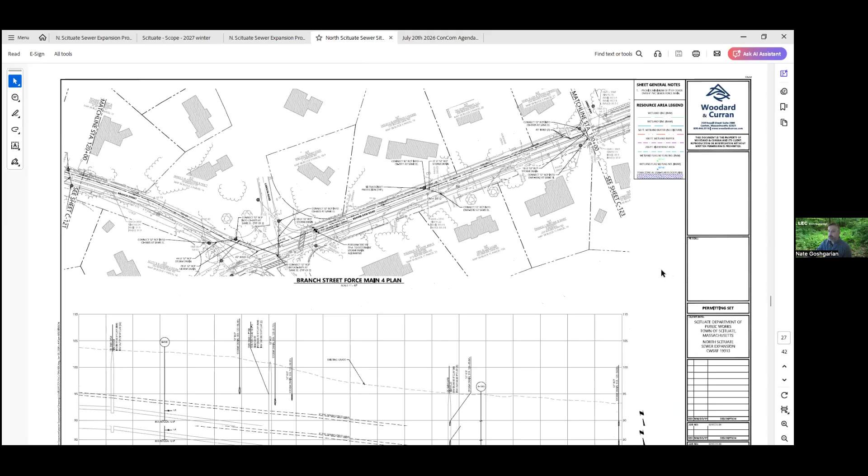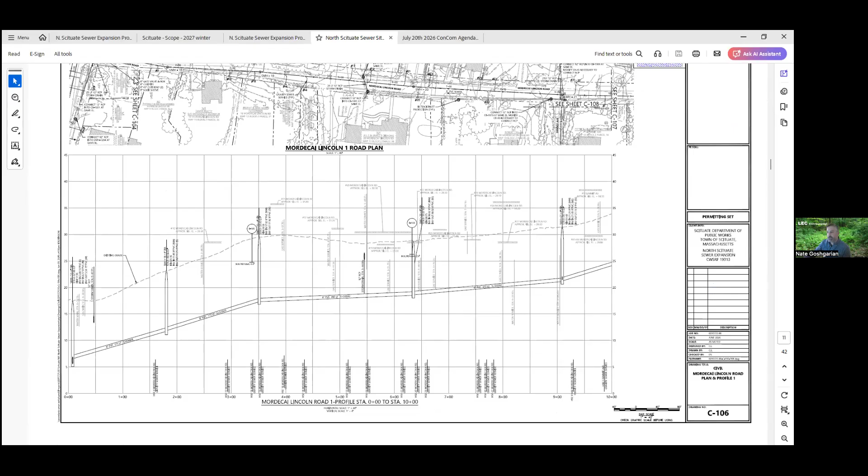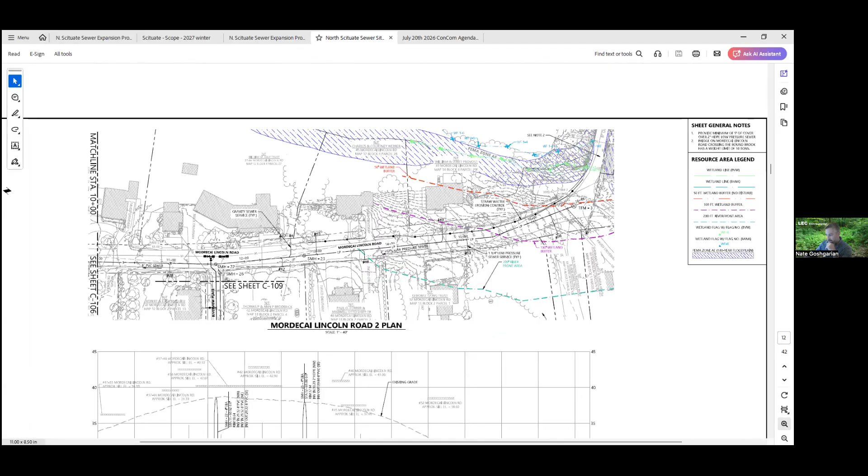Yep, perfect. So this is on its side, north is to the right. Basically what we have here is the wetland delineation in blue of bank/mean annual high water to Bound Brook. Then in green directly up gradient is our fringing bordering vegetated wetland system, and we've got the 50-foot buffer zone as well as the 100-foot buffer zone in purple. A little farther at the bottom of the page in teal blue, we've got the 200-foot riverfront area. So I wanted to show how our wetland delineation translates to the plans, as well as the associated buffer zone and riverfront area.

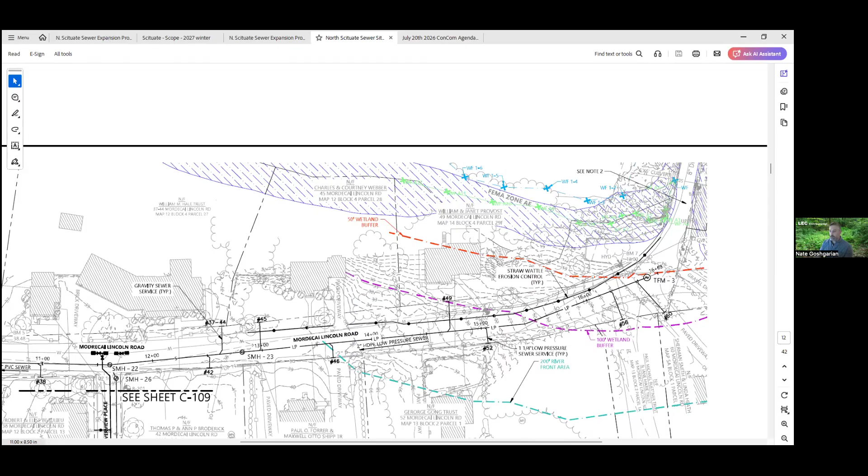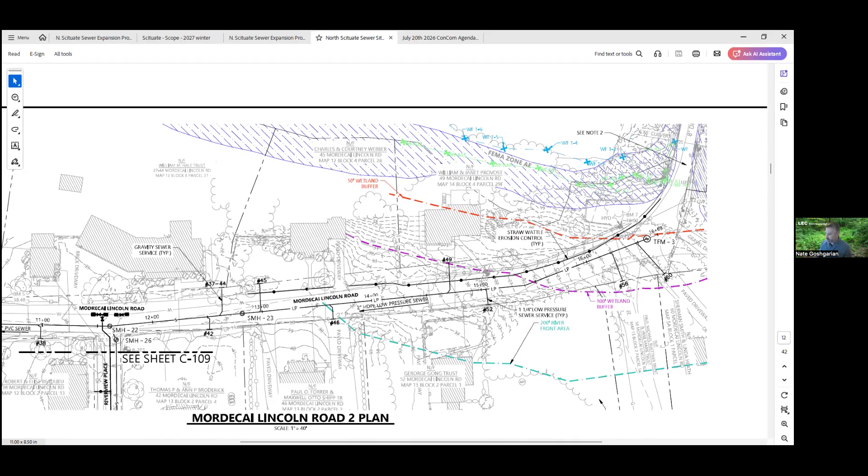This snapshot is pretty characteristic of this area in terms of what wetland resource areas are present. There are only two other sections further down a couple miles on Country Way that I want to briefly go over, regarding the two culverts being replaced. One is smaller than the first, so let's take a look at the smaller one—that can be found on sheet C112, if you don't mind.

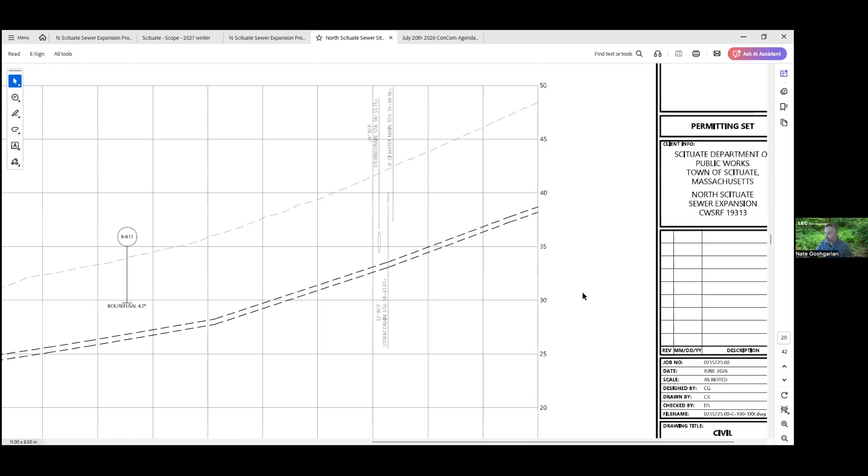Big set. There we go. Perfect. Just a little to the left.

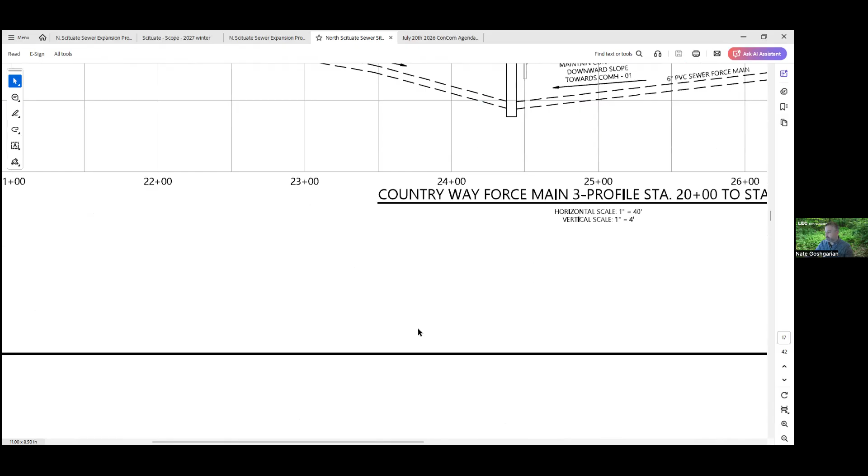The next sheet, if we could just take a quick look at that, that'll be C117. That'll look very similar to this, although the footprint is a little bit larger. So this is our second culvert to be replaced. It's a little bit larger, comes in at 28 inches by 28 inches by 60 feet.

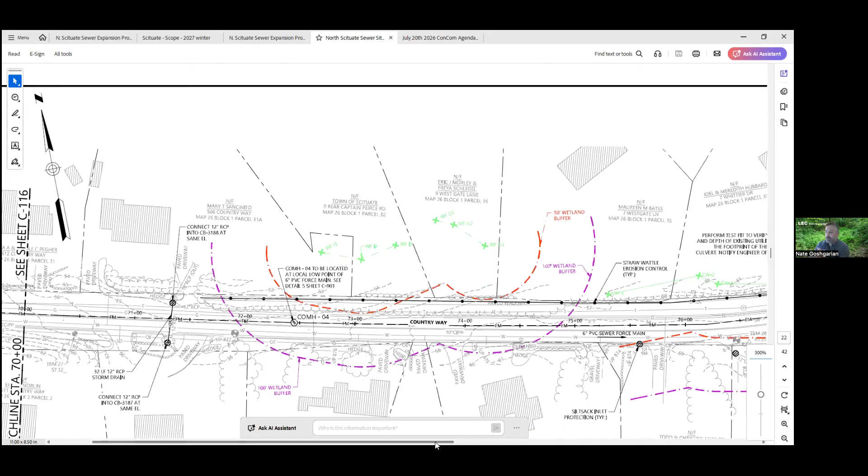You also notice that we do have a bordering vegetated wetland that I flagged out there on both sides of Country Way. Again, I just wanted to show the delineation, how it shows up in the respective buffer zones, as well as the footprint of work, which in this case specifically is the culvert replacement. So that's really a general overview of all the wetland resource areas that are effectively along this project footprint. Mr. Chairman, I'll hand it back over to you. Happy to take any questions.

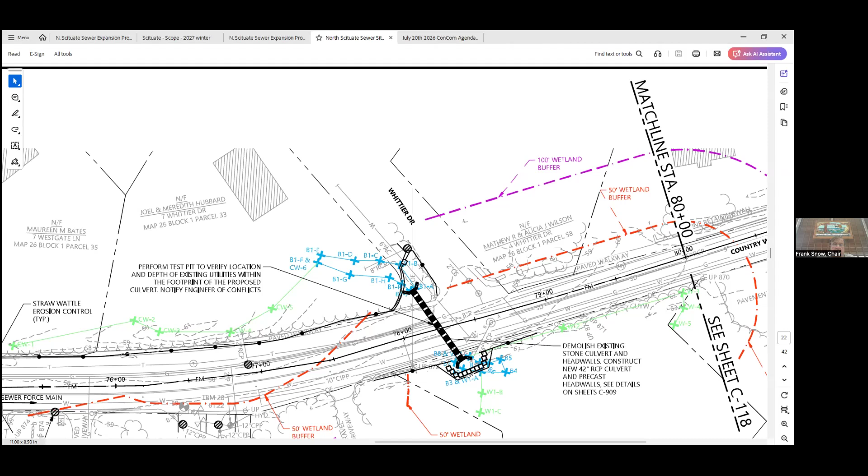Thank you. Jen, do you want to comment first? I think my question, I can't find my notes at the moment, was when might we start this work and how long do we think it would take? And I'm sorry if I missed that in the beginning.

Sure. No, I didn't go over schedule. So we're currently going through the permitting phase. In addition to this, we have an Army Corps permit we're working through right now. We're also going through securing funding through the SRF program. So those are the two main schedule constraints right now. It's permitting and funding. So the town's already been awarded the SRF funding, but we have to go through the loan package process. So long story short is we're looking to bid this sometime in the fall and start construction in the spring of 2027.

As to where the contractor is going to be working at certain times, that's means and methods. But on the gravity side, he's going to start down by the pump station and work his way from Country Way and Gannett Road upstream, up into that area closer to Cohasset. But then with the force main and the culverts, that's going to be a little bit on him or her to decide really the timing of all that based on their means and methods, just because the force main isn't gravity, it's pressure.

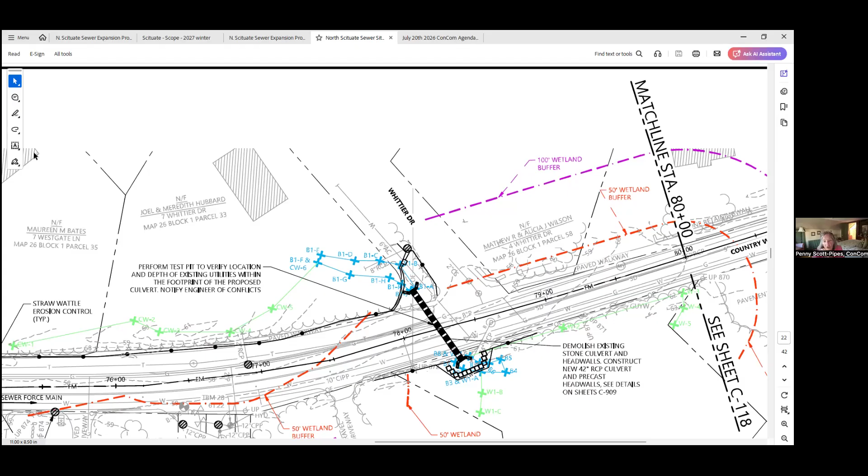Thank you. Welcome. Penny? No, I'm surprised it's gonna be done that quickly. It all looks good to me. I have my faith in their wetland lines. And, they know we'll be keeping an eye on them to make sure we don't disturb or pollute any of the wetlands. But thank you. Okay. Brendan? Yeah, I don't have any questions.

Robbie? Thanks, Frank. Thanks for the presentation. It's a great project. I think it's a long time in the making. Couple of questions I had. Could you describe the erosion control measures that you expect the contractor to take as they're constructing this?

Or Kendra, do you want to go over those? Yeah, happy to. My name is Kendra Robinson. I'm with Woodard and Curran on the civil side. We will expect the contractor to install straw wattles along the areas within the buffer of the resource areas and in other places as directed by the owner or engineer if we see a lot of sediment buildup and dispersion throughout the project area. We will also have silt sacks in all of the catch basins along the project area to prevent sediment from directly discharging into the stormwater system. And then at the culvert crossings, we'll have silt sock there for erosion control, as well as turbidity curtains and some coffer damming as necessary to make sure the work is completed in the dry to prevent sedimentation from flowing downstream.

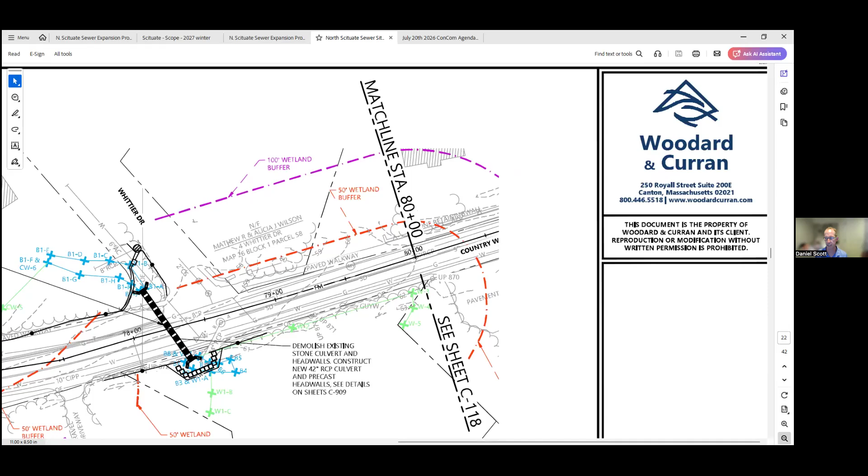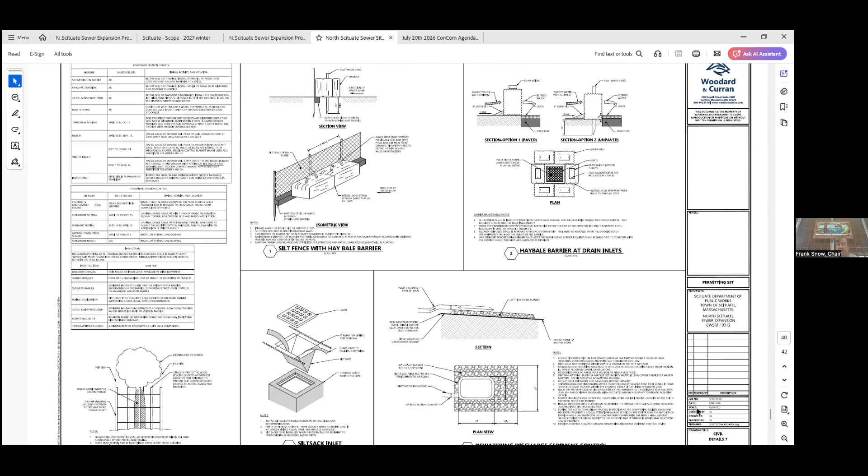And then the staging areas, is that something that will be conveyed to the commission members or Jen, so that we have the opportunity? Thank you for that. Will the staging areas or laydown areas be something we'll get notified on so we can look at that? That seems to be sometimes where we have a little bit of a hiccup.

Yeah, through these meetings and at the forefront of the project, anything in particular you want to be engaged on would be great to express to us and coordinate with us. We're more than happy to have an on-site meeting at the start of the project, once they get a representative amount of erosion and sediment control in place, and can talk big picture on the project. Or if members want to join our kickoff meeting at the beginning of construction, we're all for having you engaged as much as possible to make the project successful on the Concom side.

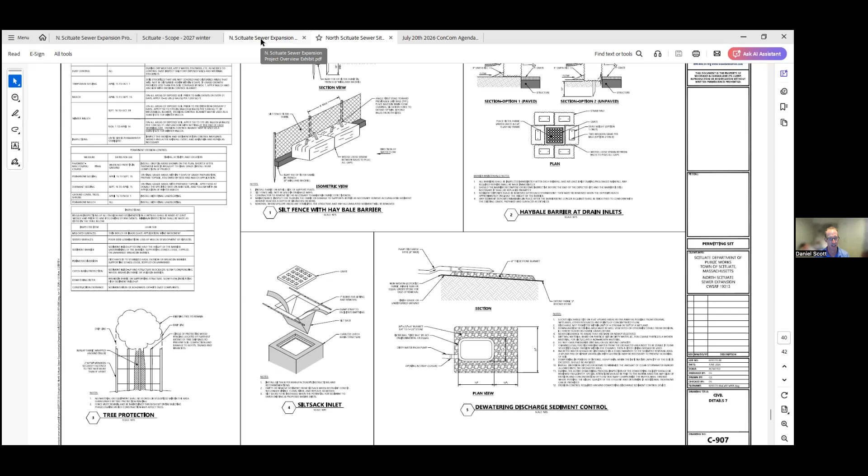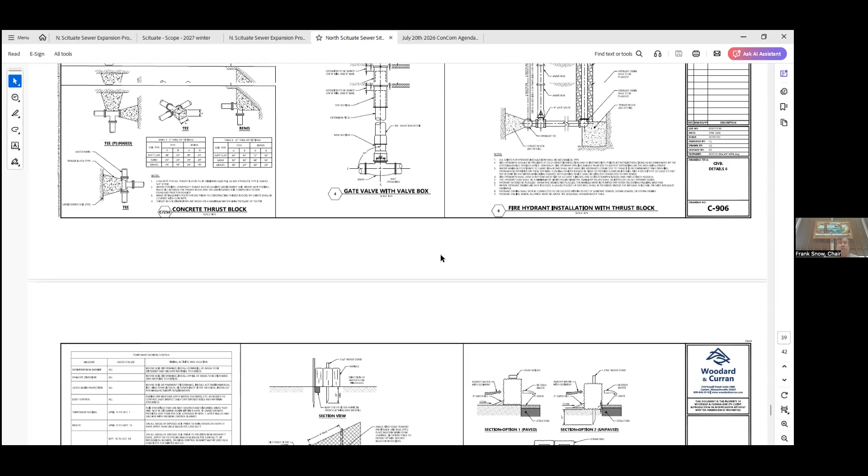It's already been said, but we're very pleased to see this happen, and we know environmentally it'll be a great addition for the North Scituate area and Bound Brook and all that. But it would be good to know early on where some of these staging areas might take place, so that we might have some comment and be sure those areas are protected as well.

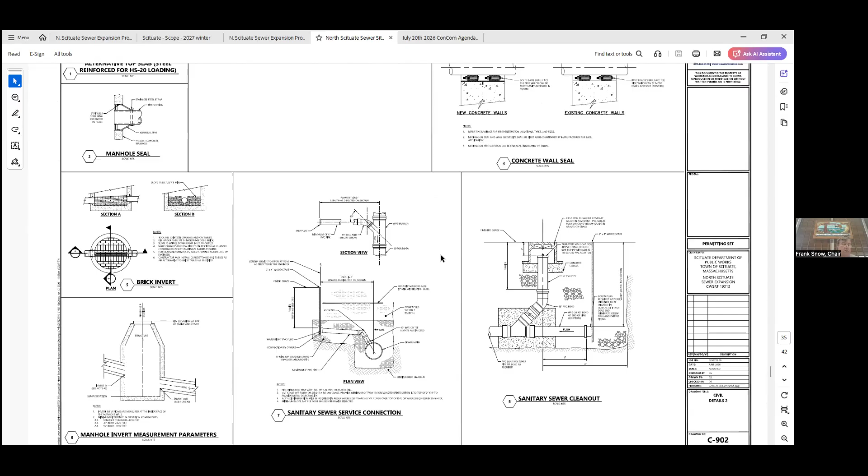I think DPW is more cognizant of the most recent project going on in Scituate at Hatherly School, which has had some issues with runoff from the site. It's a large area, and it is a town project, but they still have to meet the same standards as anybody else doing a project in town with regards to protecting our resource areas. So that information would be great if we could just keep a dialogue and know where those are going.

Maybe Sean can elaborate on this. I always thought they were going to run the sewer in the railroad track. There was a pipe that was put in back when they did that. I was just surprised to see this going up this route. Is there a reason for that?

Actually, a couple reasons. One, it's inundated with water, so we know we have leaks in it. Second, to be able to get to it is nearly impossible if something ever happened.

Got you. Will has been trying to get into a manhole that is at the intersection of Gannett and Country Way. It's been over a year to open the cover. Wow. I guess so much for well-planned projects, Sean.

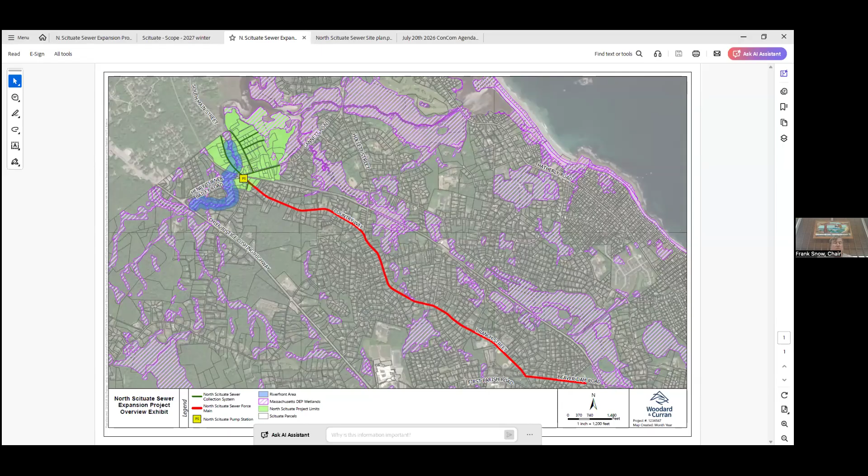On July 20th, 2026 at 6 p.m., the Scituate Conservation Commission will hold a wetlands hearing under Chapter 131, Section 40 of the Mass General Laws and Section 30700 Town of Scituate Code of Bylaws for a notice of intent filed by Michael Walsh for the demolition and reconstruction of a single-family dwelling within wetland resource areas at 107 Glades Road, Scituate. Abutters and other interested parties are invited to attend. Information, access, and meetings available at the agenda posted on the website.

How far out did we want to continue that one, Jen? The 17th of August. Are we okay continuing these to that date? Yes. So I'll make a motion, Frank, that we continue 107 Glades Road to August 17th. Motion from Penny, and Brendan shall second that. Second from Brendan, all in favor, Robbie yes, and Frank yes. Thank you.

11 10th Ave. I've got to open that one as well and then continue it. On July 20th, 2026, 6 p.m., the Scituate Conservation Commission will hold a wetlands hearing under Chapter 131, Section 40 of the Massachusetts General Laws, Section 30700, Town of Scituate Code of Bylaws, for notice of intent filed by Wesley Hutchinson for the construction of an addition to a single-family dwelling within buffer to wetlands resources located at 11 10th Ave, Scituate. Abutters and other interested parties are invited to attend. Information to access the meeting is available on the agenda posted on the website.

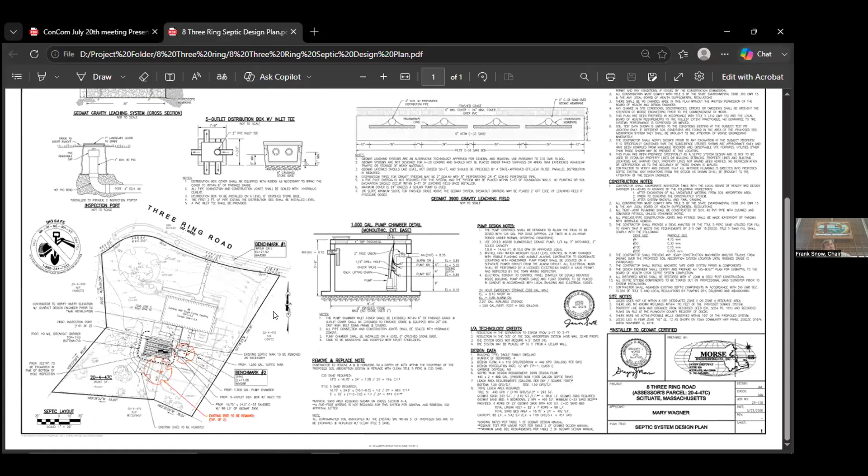Okay, now we go to 3 Ring. Oh, let's see - this is septic. Yep.

On July 20th, 2026 at 6 p.m., the Scituate Conservation Commission will hold a wetlands hearing under Chapter 131, Section 40 of Massachusetts General Laws, and Section 30700, Town of Scituate Code of Bylaws, for notice of intent filed by Mary C. Wagner for an upgrade to a septic system within the buffer to a wetlands resource, located at 8 3 Ring Road, Scituate. Abutters and other interested parties are invited to attend. Information to access this meeting is available on the agenda posted on the town website.

We have somebody from Morse Engineering. Yes, we do. Paul? Paul Gunn, you are unmuted. Can you hear me? Yes, okay great. So just for the record again, my name is Paul Gunn. I'm an engineer with Morse Engineering here tonight representing the applicants for the NOI at 8 3 Ring Road.

This site is previously disturbed and currently includes a single family dwelling with an associated driveway, some hardscaping and landscaping, and then a mixture of lawn and brush areas. There's an existing failed septic system in the rear yard, which includes a septic tank and a crushed stone leaching field. There are no vegetated resource areas or associated buffer zones on site, and it's not in any of the DEP overlay zones. The only resource area on the property is land subject to coastal storm flowage, delineated by FEMA Zone AE based on elevation 12. The floodplain encompasses the southern half of the property and ultimately connects to the Gulf River.

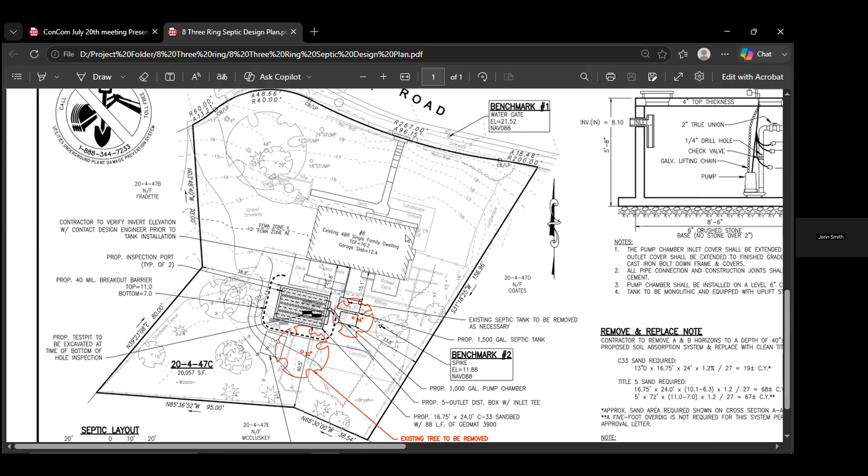Brendan? I love a good septic system. I have no questions.

Okay, Robbie? Thanks, Frank. Thanks for the presentation. I had a note - a call out above the benchmark 2 call out says existing septic tank to be removed as necessary. Is it going to be removed as part of this?

If you could zoom in a little bit on the tanks - so this building sewer exits underneath the slab, it's a walkout, so it's difficult to adjust that location. We're proposing the new tanks basically in the same spot as where part of the existing tank is. Typically, existing tanks are just filled and abandoned, but in this case they'll probably have to crush and remove most of it. It may be that one of the walls doesn't need to be removed, so that's why we said as necessary. In all likelihood, though, the whole thing's probably going to get removed.

So there'll be a new septic tank? Yes, a new septic tank, a new pump chamber, and they're going partially on top of where the existing tank is, just because we don't have a lot of flexibility with the pipe that leaves the building.

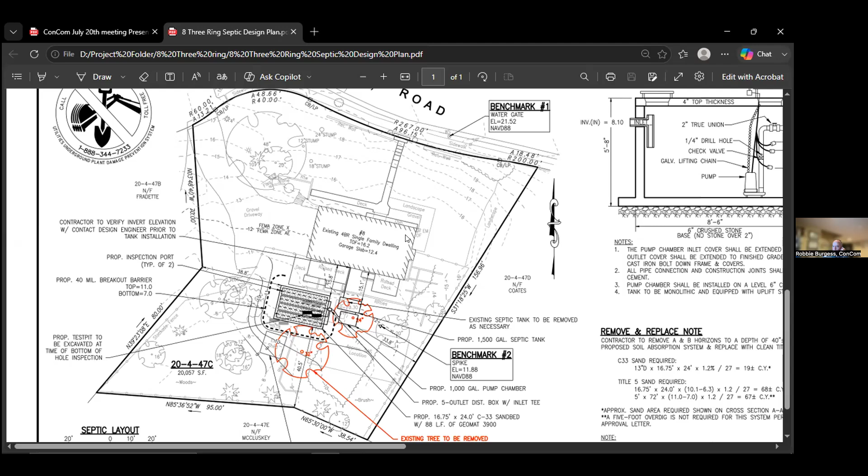And this new leaching field is in the same location as the old one? Not quite, it's closer to the house. If you can see it, it's just to the left of benchmark number 2. There's a large rectangle that says approx SAS location. The as-built info on that is not great, but that's where we believe the existing leach field is—a conventional crushed stone leaching field, which you can see is a little further south, in the southeastern portion of the property.

And was the failure from the leaching field? I'm not certain, I would have to consult the Title V report on that front. But most failures are associated with the water level in the D-box being above the outlet pipe.

So is that from failure of the leaching field and it backing up through the system? Yeah, typically with systems of this age, it's usually that the thickness of the biomat is just too much, which means water starts backing up, and if it's ever above the outlet pipe, it's considered a failure.

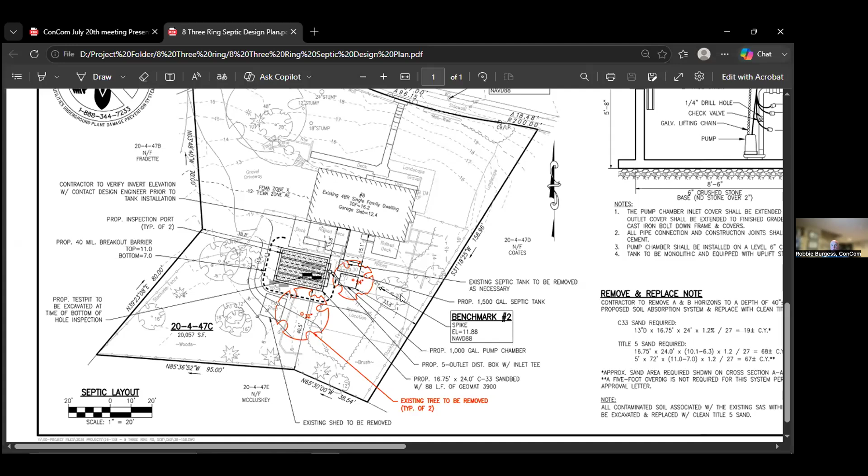But then you're putting the new system on top of that old system? No—if you zoom in, maybe about 10 square feet of the new system overlaps where the old system was. Otherwise it should be virgin material.

We also have a note that under our remove and replace, if any contaminated soil is encountered during excavation, all of it needs to be removed from the limit of the new system. Okay, good.

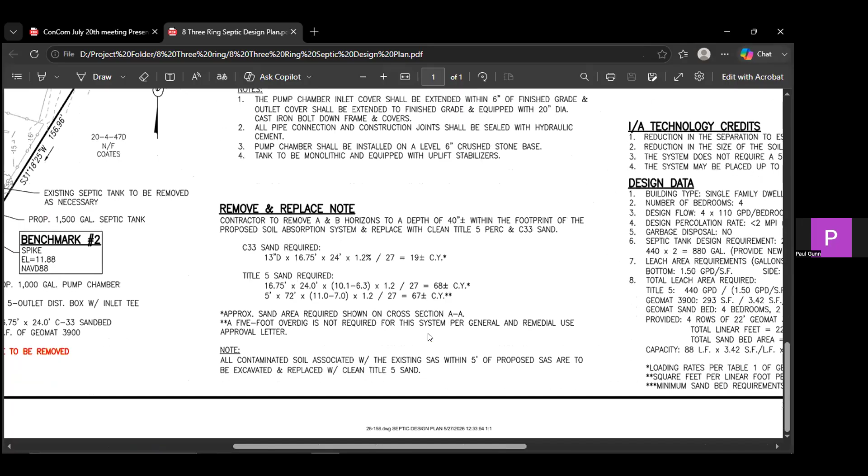No, like it was said, I like a new septic system—I think Brendan said that. So, no other questions. Thank you.

Penny asks Frank if mitigation is needed for removing two mature trees, given the yard is well wooded. Frank explains that if this were an addition or expansion, they'd typically look for mitigation, but in this case they're getting a compliant septic system that's not as deep into the water table, which he considers adequate mitigation.

I agree, but wanted to ask since Eric isn't here. It's a tough site with the slope and hill, couldn't go out front. I know they've been anxious to move this along, it got delayed. I went out to take a quick look and understand where the tank, pump chamber, and old leaching area are located. The good news is the Board of Health inspects the location once they excavate the field, so there are multiple inspections during the process.

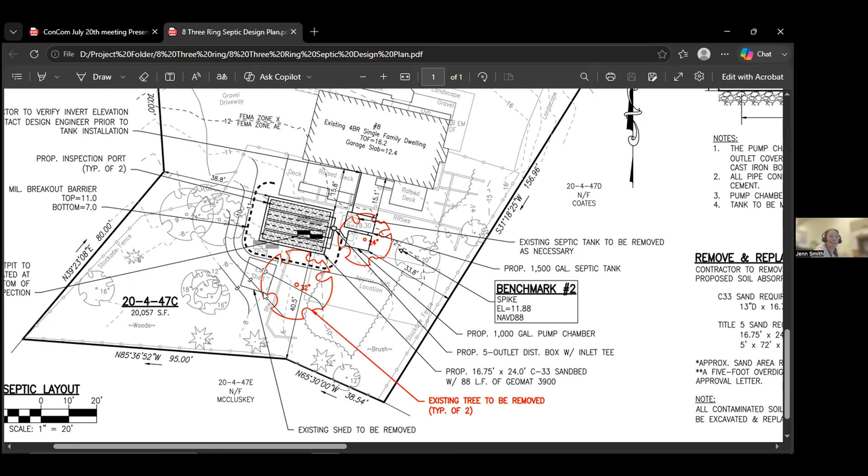Sorry about that, I was just saying, I'm Andrea Wagner on iPad AW. I'm here with my mother, Mary Wagner, the homeowner. Hi, I'm just here if you need me.

Oh great, I know Mary that you've been waiting a while to get this moved along, and I think we got all the questions answered. Does anybody have any questions for Mary?

I think Paul's done a pretty good job of laying this out. He did a great job. Thank you, thank you, okay.

Anybody else? Okay, ready to go, Frank.

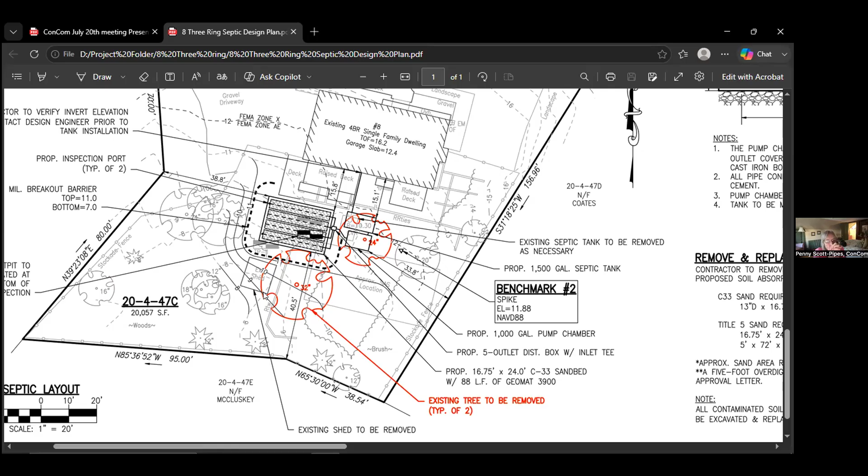I think I could take a motion. I make a motion that we close and issue an order for Three Ring Farm. That's a motion by Penny, do I have a second? I second that, from Brendan. All in favor? Robbie, yes. And Frank, yes.

So with that, Mary, the commission closes the hearing, and then the office will generate a set of orders for your project. I know this has gotten delayed a couple of times, so let's see what we can do to move that along.

I think that's it for that one. Okay. Thank you, thanks Paul. Yep, thank you.

What are we at? Number 9, Pond View.

On July 20th at 6 p.m., the Scituate Conservation Commission will hold a wetlands hearing under Chapter 131, Section 40 of Massachusetts General Laws and Section 30700 of the Town of Scituate Code of Bylaws, for a notice of intent filed by the Shea Family Realty Trust for the expansion of an existing porch and after-the-fact filing of a patio within a wetlands resource area at 9 Pondview Avenue, Scituate. Abutters and other interested parties are invited to attend. Information to access the meeting will be available on the agenda posted on the website.

Hi there again, I'm here for Morse again. Just for the record, Paul Gunn, professional engineer with Morse Engineering. Sorry Jen, did I cut you off? I was just going to make sure you knew you were unmuted. Okay, all right, so I'm here again to represent the applicant for the NOI at 9 Pondview.

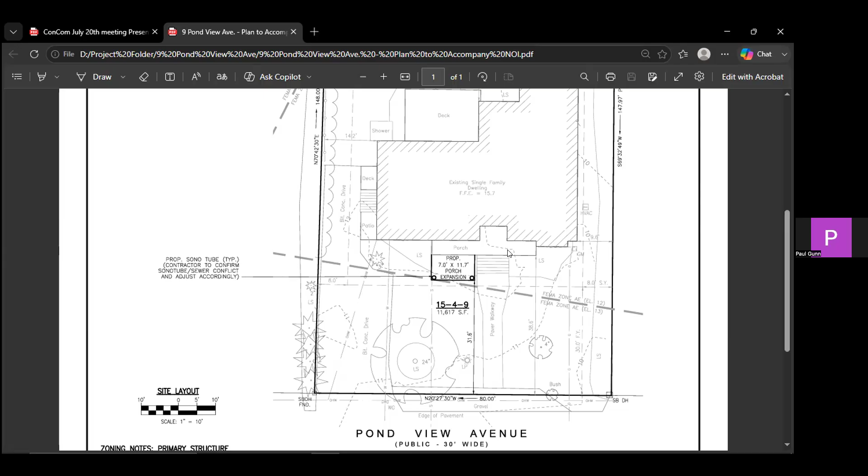No comments from DEP. We have the abutter notification, and I'm looking at the plan dated June 24th, 2026. The previous orders were closed out, and that work was done according to the plan. I think here the only addition is the porch, with no additional living space, as the existing porch remains a porch.

Yes, that's correct, they're just expanding it. I don't have any other questions. There's no trees coming down for any of this work, and no particular vegetation being removed. I appreciate the update on the other work done in the backyard. Thank you.

Do I start with the last? I guess we're back to Penny, maybe? Yes, you are. I don't have any questions on this, it looks pretty straightforward to me. Brendan? I do not have any questions. Robbie?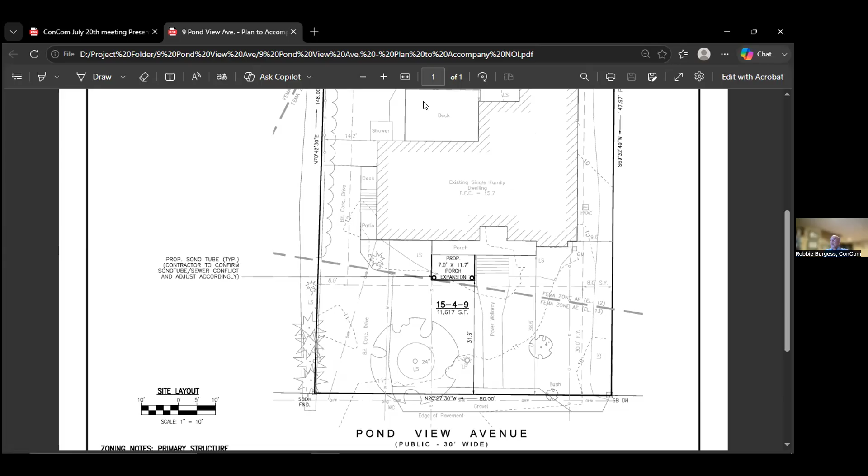Thanks, Frank. The after-the-fact patio, was that built by the homeowner? Yes, if you scroll up a bit, Jen, you can see it. It's that patio there that connects to the detached structure labeled as a garage. It's not functionally used as one, but it's that patio in question right there.

Okay, I don't have any other questions. Do we have anybody in the audience for this one? I do not see any hands raised. I don't have any questions either. I'm glad they brought up the other patio and addressed it along with this expansion, so now we have a concise set of plans. I'm okay with that.

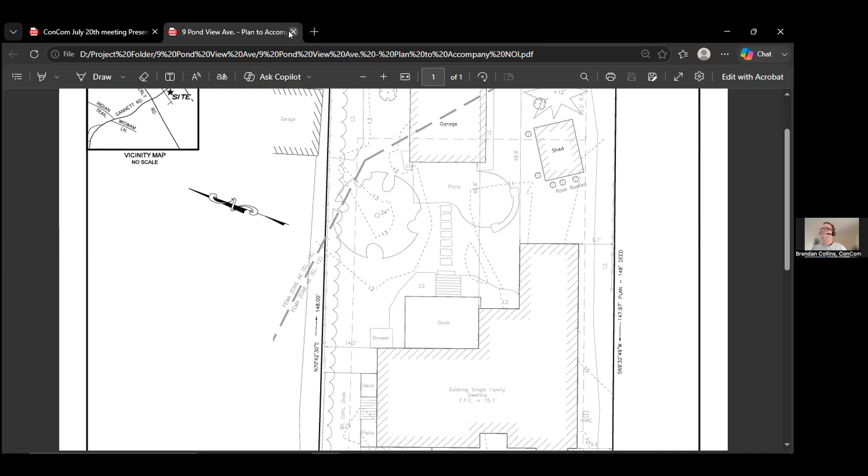I'll make a motion, Frank, to close and issue for Pond View Ave. That's a motion from Penny, a second from Brendan. All in favor? Robbie, yes. Frank, yes. Thank you.

So now 18 and 20 Country Way. The applicant is requesting to continue to August 17th. I think we already opened this, correct. I'll make a motion, Frank, to continue 18 and 20 Country Way to August 17th. That's a motion from Penny, a second from Brendan. All in favor? Robbie, yes. Frank, yes. Thank you.

Okay, 7 New Driftway. Looks like they'd also like to continue to September 9th, which is a Wednesday. Have we opened that? Yes, we did. That's the one where the road access to the building was around the rear. I'll make a motion to continue 7 New Driftway to September 9th. It's Penny, a second from Brendan. All in favor? Robbie, yes. Frank, yes.

Thank you. Okay, 430 Hatherly Road. We're doing okay here.

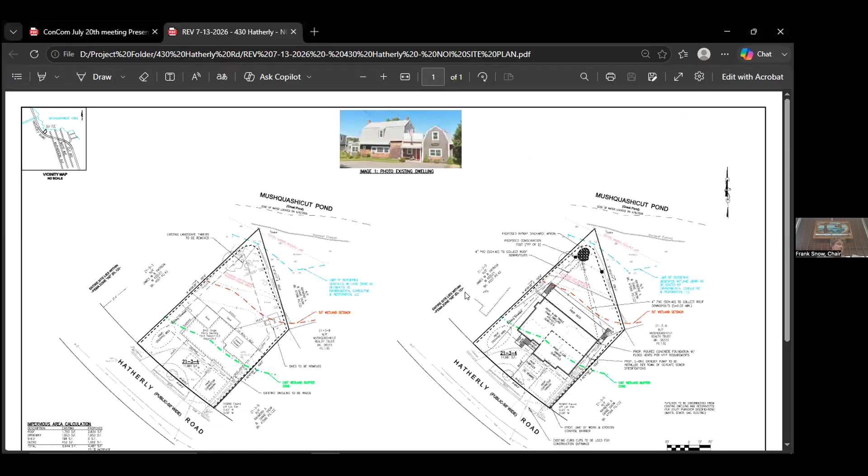On July 20th, 2026, 6 p.m., the Scituate Conservation Commission will hold a wetlands hearing under Chapter 131, Section 40 of the Massachusetts General Laws and Section 30700 of the Town of Scituate Code of Bylaws, for a notice of intent filed by Edward Johnson for the demolition and reconstruction of a single-family dwelling within the wetland resources area at 430 Hatherly Road, Scituate. Abutters and other interested parties are invited to attend. Information to access the meeting is available on the agenda posted on the website.

Hello there, this is Paul Gunn again, professional with Morse Engineering, here tonight representing the applicants for the NOI at 430 Hatherly. This is a previously disturbed site that includes a single-family dwelling with an associated turnaround paved driveway, some rear yard decks, a lawn, and a shed in the rear yard. The existing dwelling is served by subsurface utilities including sewer, so no septic system here, and an overhead electric line.

There are two resource areas on site. The first is a bordering vegetated wetland, which was delineated by Brad Holmes in April of this year, and its associated buffer zone, which borders Mushquashicut Pond. The second is land subject to coastal storm flowage, delineated by FEMA zone AE based on elevation 12, which covers the entire property.

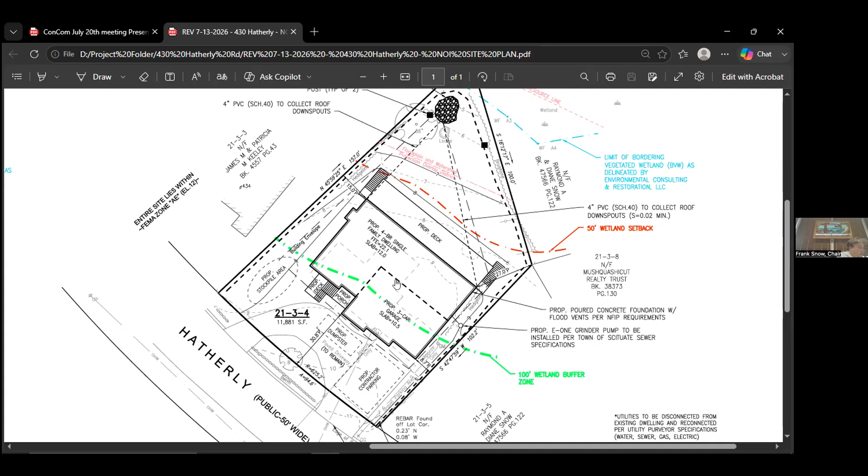So the existing driveway - just trying to make it out on your plan. That's like a circle, so you're gonna maintain that circular driveway? Yes, right now it comes in at the bottom right corner, exits at the top left corner. So the goal is to maintain that. Obviously a little bit of work will have to be done to connect that to the proposed garage bays, but the goal is to do as little work there as possible. They want to maintain that driveway in its current footprint and condition.

Is that obvious to everybody? You can see the outline of that - it's kind of a circular driveway. It's a tough corner, so in terms of being safe coming and going from that house, it's probably needed. We're on sort of that bend on Hatherly Road, which is pretty tough to get in and out of.

So the grade of the proposed garage will blend to that existing driveway? Yes. So that slab's at 10. And then the slab for the house is higher than the garage by 1.5 feet? That's correct, yeah, but that's unfinished - no utilities or anything.

What's that flood elevation there? It should be right - the flood elevation is 12. But it'll have flood vents and it's going to be unfinished storage. Okay, so no habitable living space. So that's 8... is that right? Yes, AE 12. Okay.

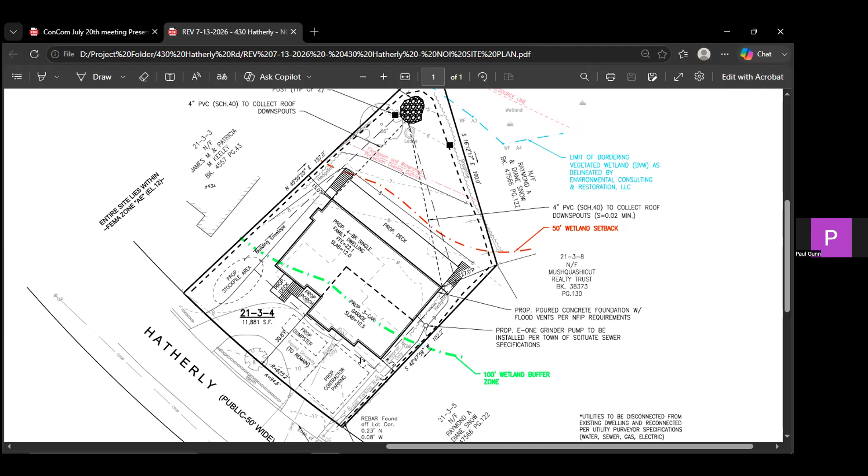Yeah, so they'll have to move - they have an E-One grinder pump now, they'll have to relocate that. Water, we're expecting just to disconnect and reconnect, same with the electric. Currently they have an overhead wire that comes across the street. And if they're doing anything like a generator, we need to know. I do not know if they are, but I will double check and include anything on the revised plans - generator or HVAC.

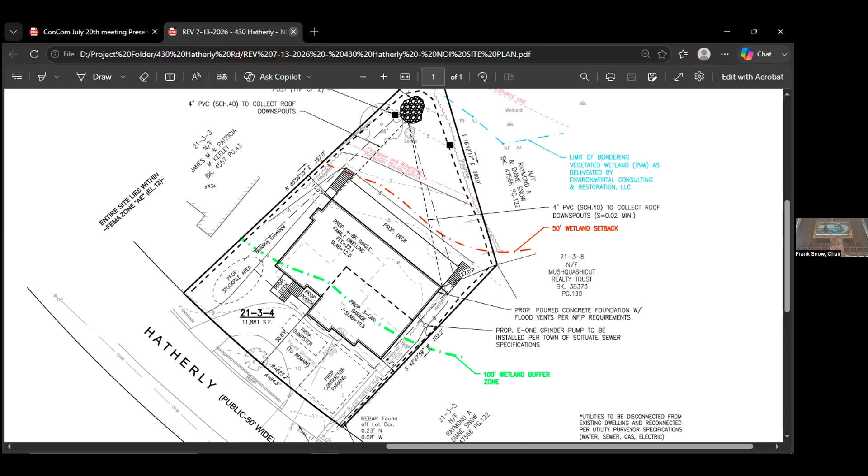All right, so we're gonna continue this to August 17th. I make a motion we continue 430 Hatherly Road to August 17th. Motion by Penny, seconded by Brendan. All in favor? Robbie, yes. Frank, yes. Okay, all right, thank you.

Thank you very much. The next one is Country Club Circle.

I gotta take a 2-minute break. I'll be right back. Okay.

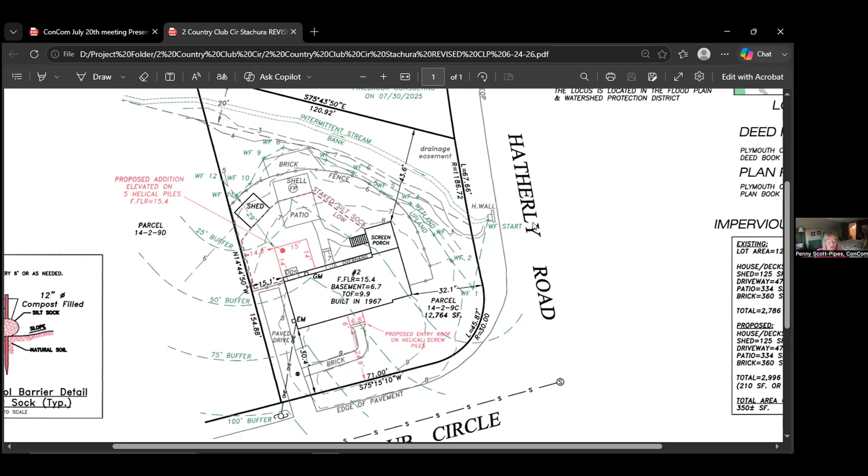Okay, then I'll make a motion to close and issue with all the conditions we talked about. Yes. Richard, you can put that into the plan, right? Yes, absolutely, and I can get the planting plan together quickly and get it into the commission. Great, thank you. Okay, thank you very much, thank you for working with us on this.

Did we vote on everything? We got that, right? No, we haven't got a second vote from Brendan. All right, let's do that. We got a motion. Okay, for Penny, yeah, you already got a second motion from Brendan. All in favor, Robbie? Yes. And Frank, yes. All right, keep me on my toes.

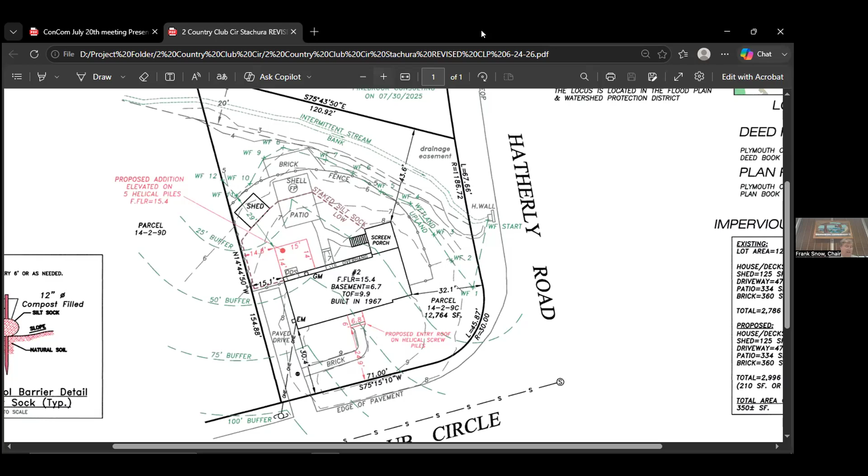James Landing, are they requesting a continuance? No, they're definitely not. They were continued from July 6th, and we didn't have a DEP number. So we were waiting for that, which we've received. There weren't any comments.

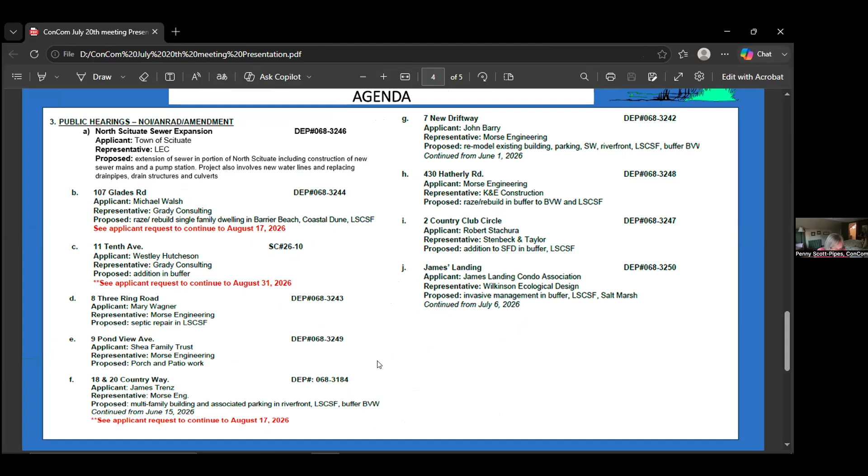So unless anybody has any questions, I'm not sure if anybody's here for it, but otherwise we were ready to close the issue. We just wanted to get the DEP number. That's right too, sorry about that. That's right, we had it from the last meeting. Does anybody else have any thoughts or questions from this? No, I thought that was a good presentation.

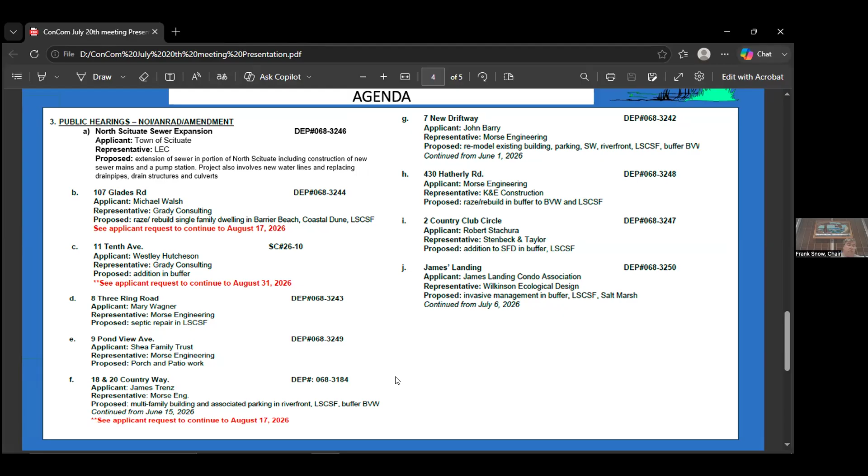It was, it was. Okay, so I'll make a motion that we close the issue, Jen. Penny, a second, I will second that as well. Brendan, all in favor, Robbie? Yes. And Frank, yes. Great, thank you.

Okay, sorry Cam, we wish we got you on here sooner. I'm sorry, well, Cole Parkway gazebo project, can we just do Bailey's Island quickly? Oh, it's a continuance. I make a motion we continue Bailey's Island to August 17th. Oh, we got room for that, Jen?

Barely, but that's what it says on the agenda. We can make that happen. That's what they're requesting. I'm asking. Oh, I understand, I'm sorry.

I mean, it's probably truthfully better to go to the 31st. Well, do you want to do that? I'm fine with that. I just know that we've already moved a bunch of stuff to the 17th. All right, I make a motion we continue zero Bailey's Island to August

31st, did you say? Yes, please, 31st. Okay, it's a motion from Penny. Do I have a second? I will second that. Okay. Brendan, all in favor? Robbie? Yes. And Frank, yes.

Okay, okay, I guess I was really in a rush to get beyond this. Sorry. Yeah, so...

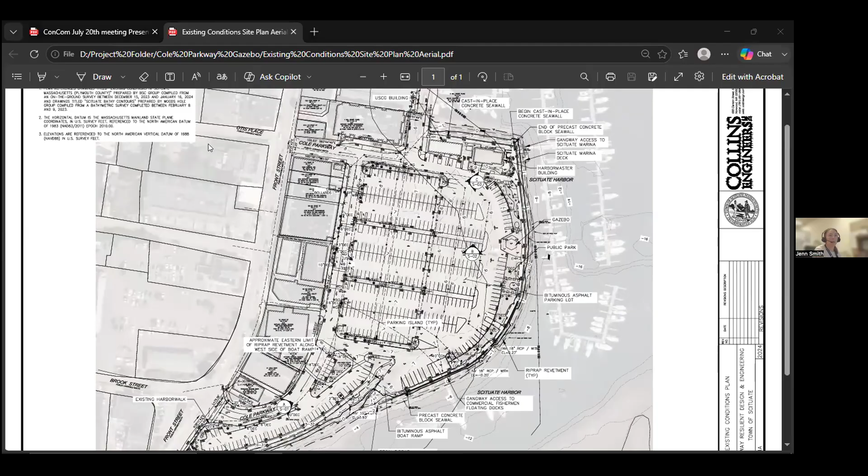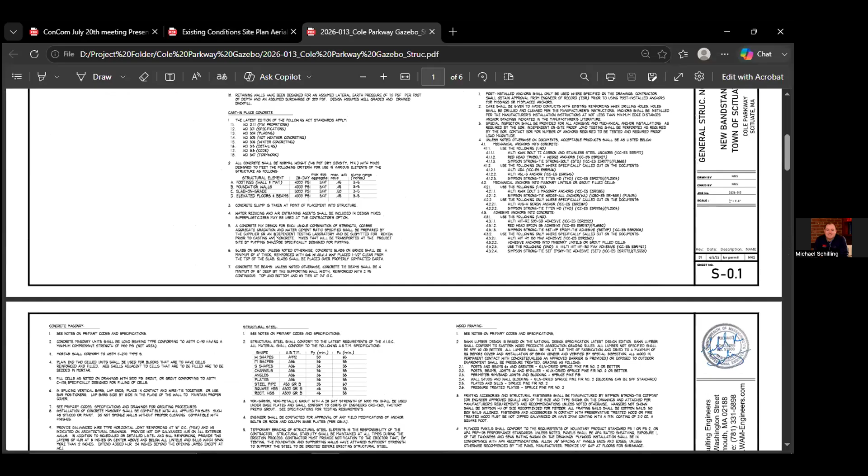And while that's happening, can we bring up the structurals also? Oh, I'm unmuting him. Sorry. No worries. Good evening, everybody. Good evening. Okay. Are the structurals up on screen? They're there. All right, so basically what we have is that the

diameter of the gazebo has been increased from 24 feet in diameter to 26 feet in diameter. Based upon our structural evaluation, we were actually able to decrease the number of footings from what was on the original construction drawings from the gazebo back in 1970, which had 12 footings. We are only in need of 11. Now, those footing sizes have increased in size a little bit just because we're dealing with an uplift issue, obviously, with it being on the water. We had to make those evaluations that would not have been done back in 1970. So that is really the only difference.

We have, like I said, one less foundation in the ground than we were previously. They're slightly larger, but minimally, just to increase the weight that I need in the foundation to counteract any uplift that would happen during storms on the coast there. Okay.

And then as far as electric, there was electric feeding the previous gazebo. That'll be all very similar, but we don't have any drawings at the moment for electrical. I don't know exactly what route we're going to take. There is a temporary setup down there now with National Grid, and I might come back and propose that it is firmed up and stays longer. It's actually much better than what was there before—we were actually very far out of code before, it was way too low on the ground. So I don't have any electrical plans with me at this point; this is just the structure itself.

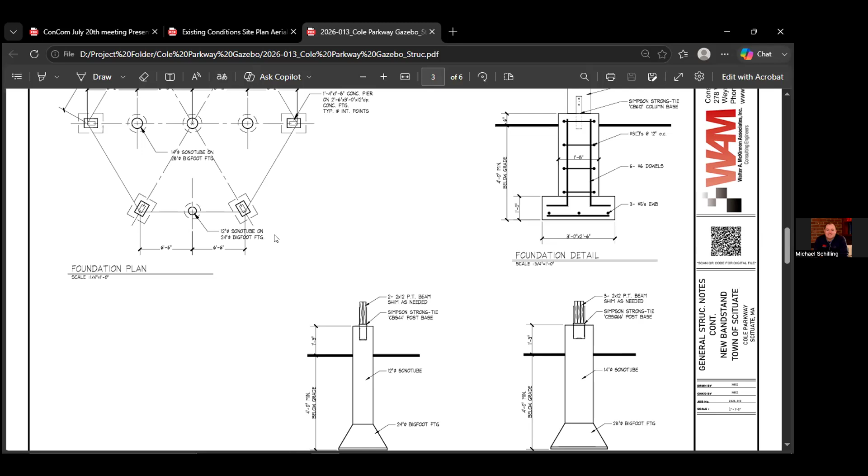Jen, can we scroll up or down a little bit to see a little bit of the framing? Maybe. Is there a little bit more there that shows?

You keep going—yeah, if you keep going to the last page, there is a full section. Yep, there they are. Great.

So there's about 16 inches. That's to the beam, and then it's even more to the bottom of the joist. That's correct.

And will there be any step up needed to get into the gazebo? There will be steps on one side.

One thing we've recommended to the town is that, before, the old gazebo had a retrofitted handicap ramp. Our recommendation has been that the town invest in kind of a temporary structure for the handicap ramp that could be removed if a large storm was coming in, instead of making it permanent and possibly having it damaged during a storm or having components turn into projectiles. Our recommendation was to make it more of a temporary structure that could be brought out during the summer months but brought in during the winter and put in storage.

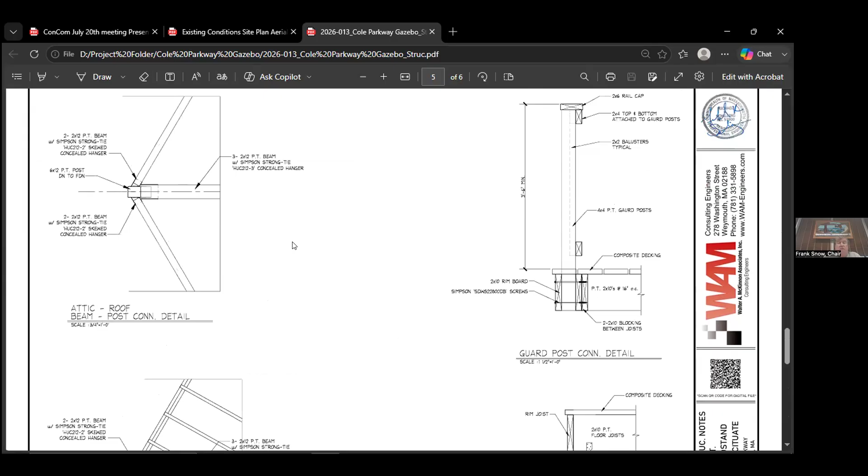Can we go back to a floor plan? Sorry, Rob, I don't mean to interrupt, but I'm wondering if we can see where there are existing stairs—how do people step up to this now? Currently there's just 2 or 3 stairs on one side of it, and the other sides have some rail. Well, it did have some rail, but was also open towards the back.

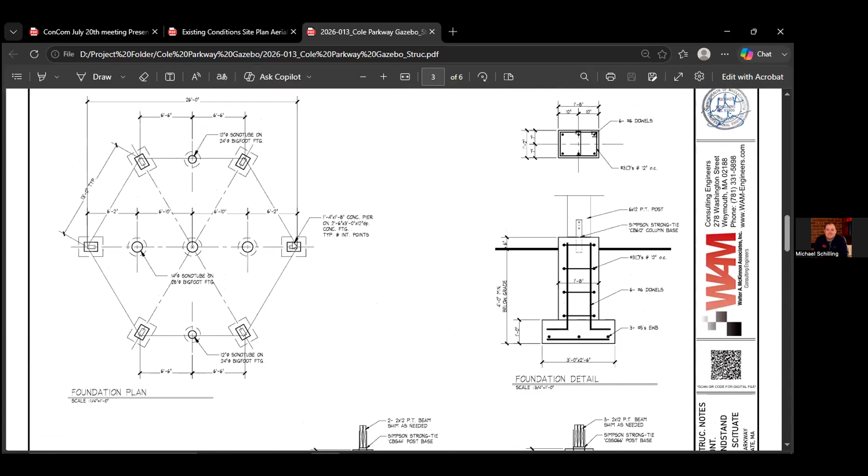We're proposing that as well—that they would have stairs coming in off the parking lot area and onto the boardwalk in the rear, and we would have the code-required railings on the other 4 sides. But are we seeing those steps in any of these plans? I'm not even... no, they're not part of the structural drawings, unfortunately.

Sorry, Robbie, I didn't mean to interrupt. Personally, it might not be ConCom's jurisdiction in terms of accessibility, but I think it's a missed opportunity to go to this effort to rebuild the structure and then have a temporary ramp adjacent to it. It just seems like the town should spend more money and do it right the first time.

Another question I had was with the foundation system. So looking at the larger ones, it looks like there are 2, 4, 6 larger foundations that are about 3 feet. Yep, looks like it'll be a 2-pour foundation, right—do the footing and then the stem. Correct. So then they're 3 feet at the base, and you probably need a foot at least to get your formwork in there and excavate. So you've got a 5-foot excavation in 6 locations.

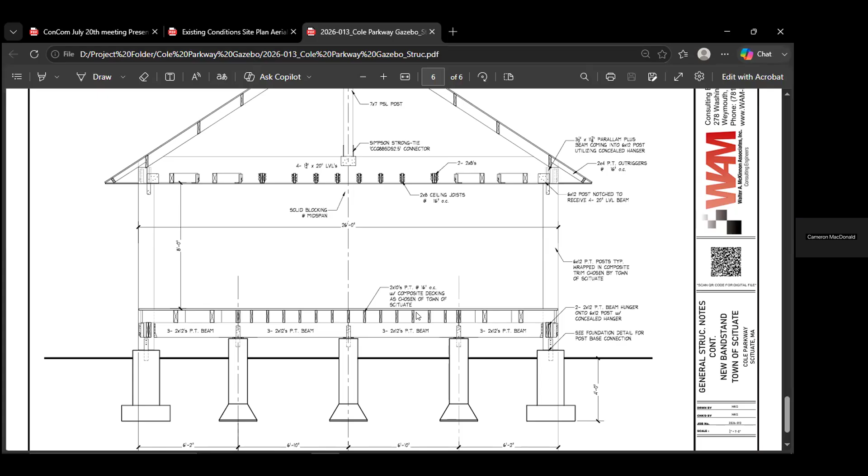Yes, it's AE. I don't believe I need to find my plan. I'll look it up, Cam, a different way. It was shared with Mike. Mike, I'm not sure if you know. Zoom in here. Mike, what did you have for a flood zone? Is that foundation compliant for that zone?

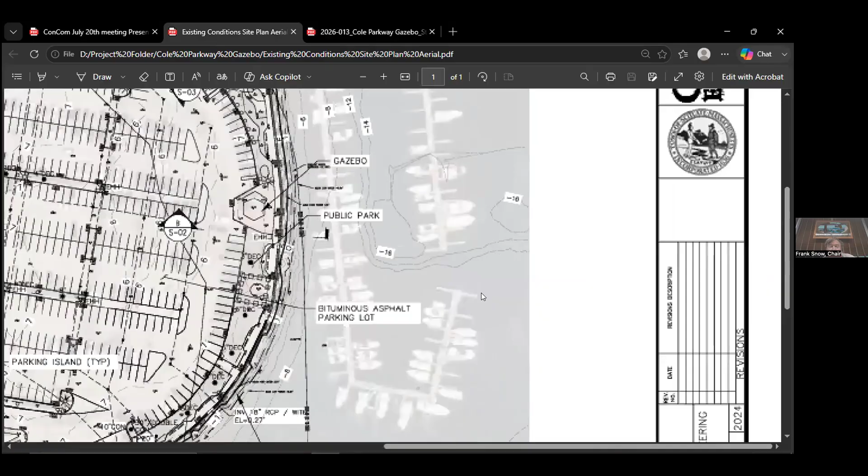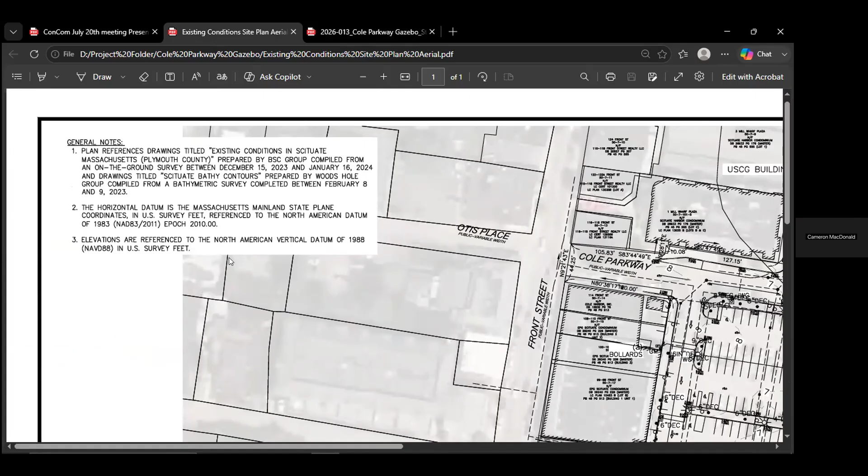I believe so, we were supplied with an older plan. Yeah, it's this one here, Mike. If you can see the screen, she's pulled it up. Let me see. And this is basically the Cole Parkway, the big project that's being worked on. This is the plan for that, so we kind of worked off that. Shift back to the location of the...

So it's elevation, I think that's something you might want to make sure you address, is the compliance of that in that zone. Yeah, no, definitely. All right, it's not a home, but we do have issues with like spread footings and things like that, so it'd be worth it to take a look.

If the board decided to continue it to the next meeting, if the foundations are of concern, we could run through an alternate design and provide both for the board to review, and then a decision could be made on which direction to go for the foundation system.

Okay, well, I think we need to continue it. I'm not sure what date we continue it to, but I think it would be good to look at that as well as the accessibility and find out just what you need to do. Maybe even on that plan, show us what you're planning to do for steps and the area right around it, if it's going to remain the brick pavers or whatever is happening there. We should have a little bit more of a site plan in that regard.

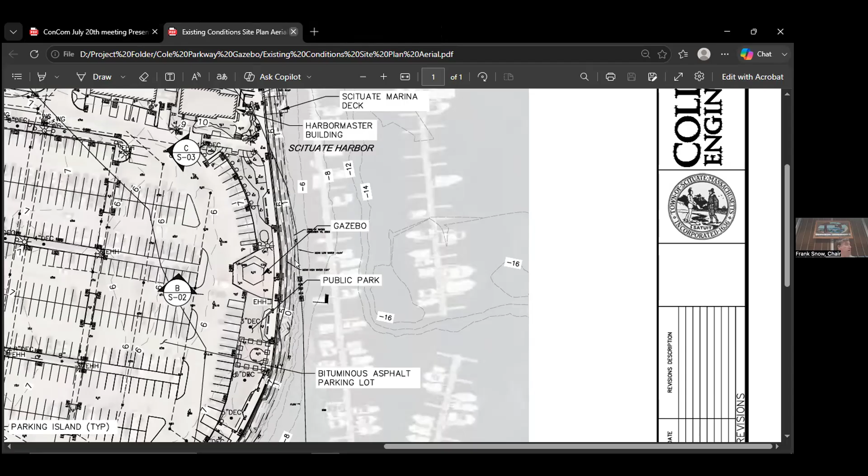139 Turner Road, July 20th, 2026, 6 p.m. The Scituate Conservation Commission will hold a wetlands hearing under Chapter 131, Section 40 of the Massachusetts General Laws and Section 30700 of the Town of Scituate Code of Bylaws, for a request for determination of applicability filed by Wilhelm Construction for the installation of new stair landings located at 139 Turner Road, Scituate. Abutters and other interested parties are invited to attend. Information to access the meeting is available on the agenda posted on the website.

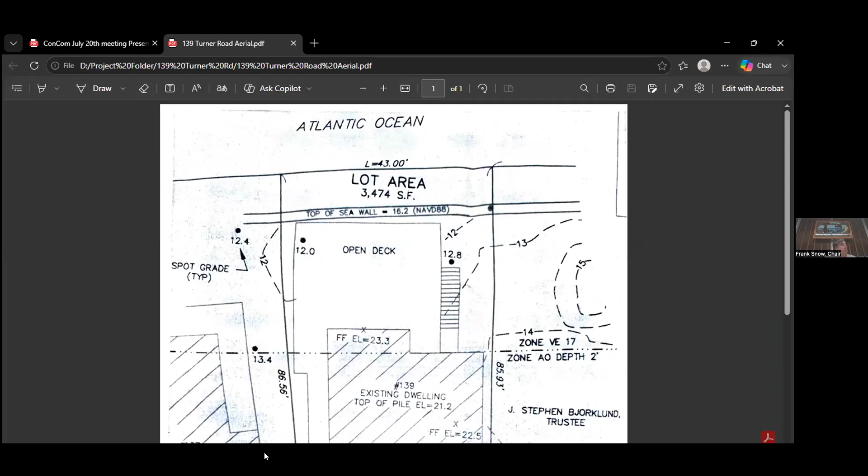We have somebody from Wilhelm Construction. Yes, we have Jared Wilhelm, and I believe Steve Bjorklund is also helping to present.

And the proposal is to just use regular sonotubes, not Bigfoot footings, and actually hand dig the footings in as shown on the plan. So it's a reasonably simple project, just an RDA, and there's no vegetation being taken out or anything like that. It's right along the edge of the street in the front of the house, if you could see that on the plan. That's basically it. Jared could probably answer any questions as far as the structural part of it, but it's really just the hand digging of the footings. Any questions, we'll try and answer them.